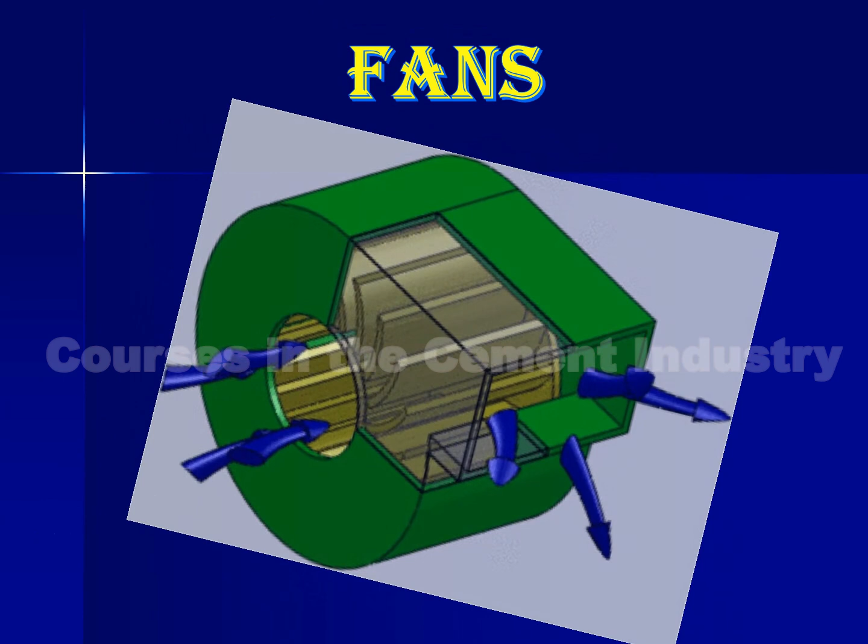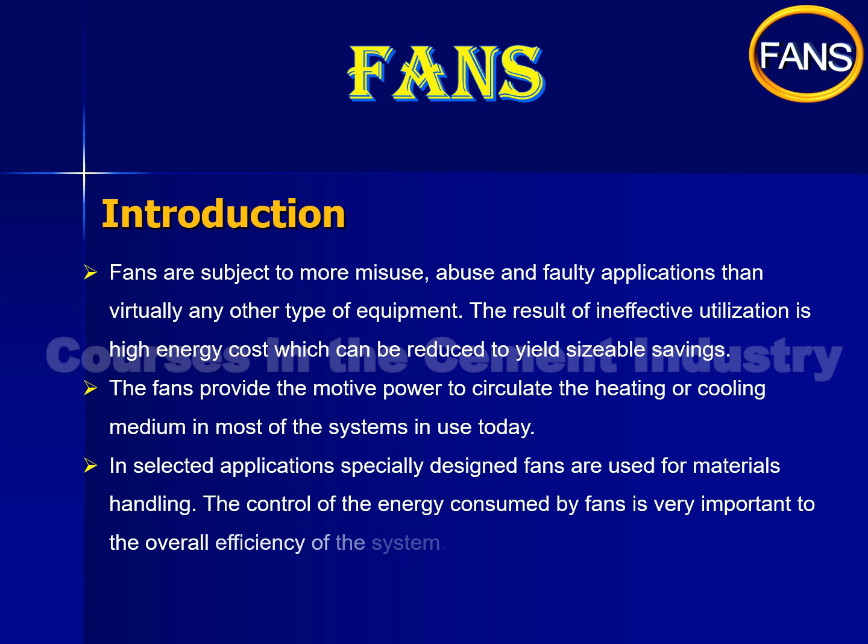Introduction. Fans are subject to more misuse, abuse, and faulty applications than virtually any other type of equipment. The result of ineffective utilization is high energy cost, which can be reduced to yield sizable savings. Fans provide the motive power to circulate the heating or cooling medium in most systems in use today. In selected applications, specially designed fans are used for materials handling. The control of the energy consumed by fans is very important to the overall efficiency of the system.

Definitions for fan. A fan is a device that causes flow of a gaseous fluid by creating a pressure difference on the medium to be transported. The gaseous fluid transported by the fan is most often air, or toxic fumes, whereas blowers may transport a mixture of particulates and air.

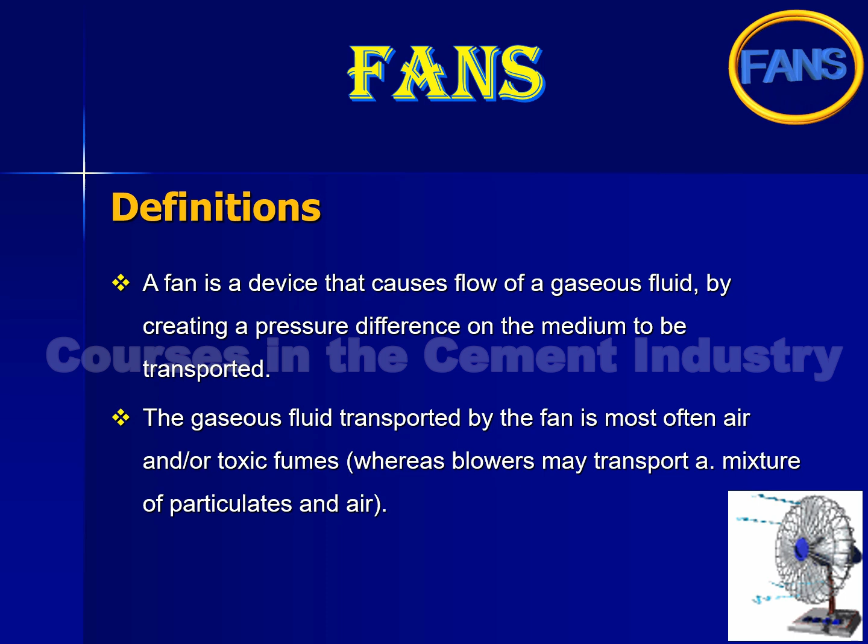A brief on fans: 1. They are air displacement systems, moving air continuously to moderate pressures. 2. Due to little change in pressure of air in fans, air is considered to be incompressible. 3. They can have pressure rise up to 2 psig.

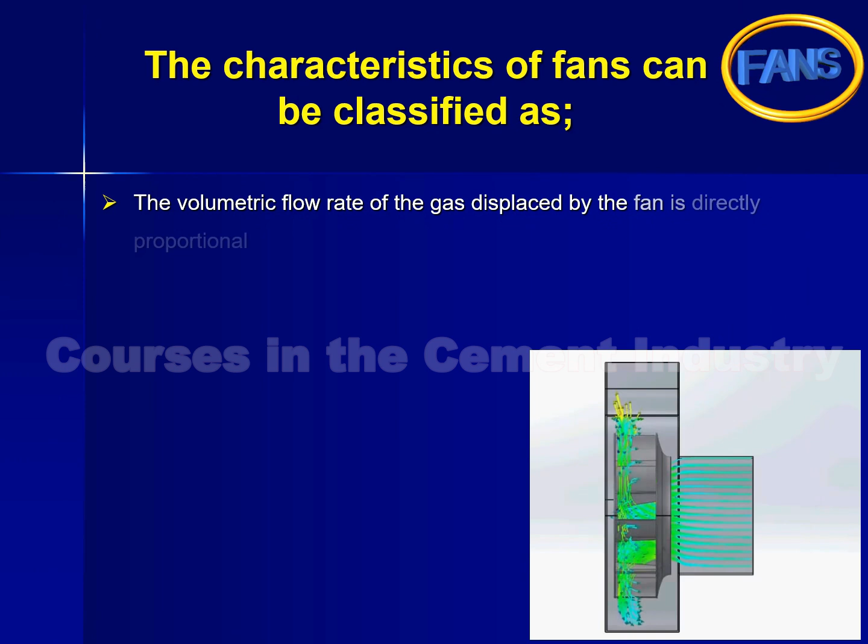The characteristics of fans can be classified as: 1. The volumetric flow rate of the gas displaced by the fan is directly proportional to the fan speed. 2. The static pressure varies with the square of the fan speed. 3. The power consumed varies with the cube of the fan speed.

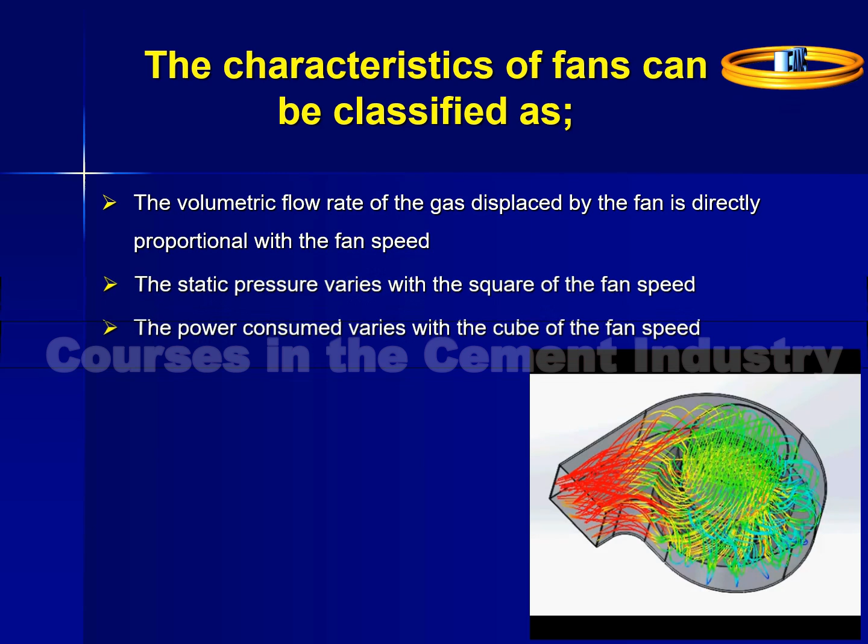Fan type: 1. Axial fans, divided into tube fans, propeller fans, and vane fans. 2. Centrifugal fans, divided into radial blade, forward curved, backward curved, and airfoil.

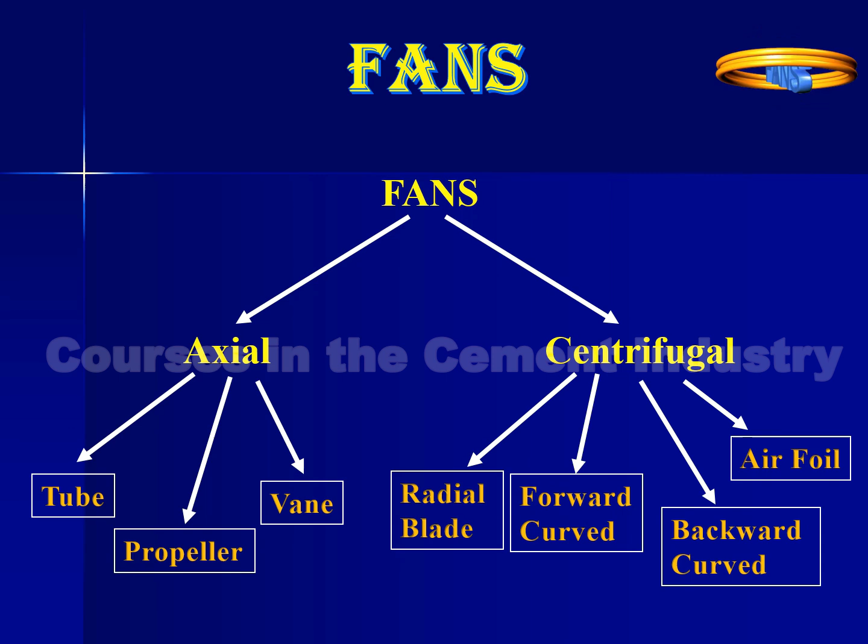Axial fans: gas moves parallel to the axis of rotation. There are 3 types of axial fans: 1. Tube axial fans. 2. Propeller axial fans. 3. Vane axial fans.

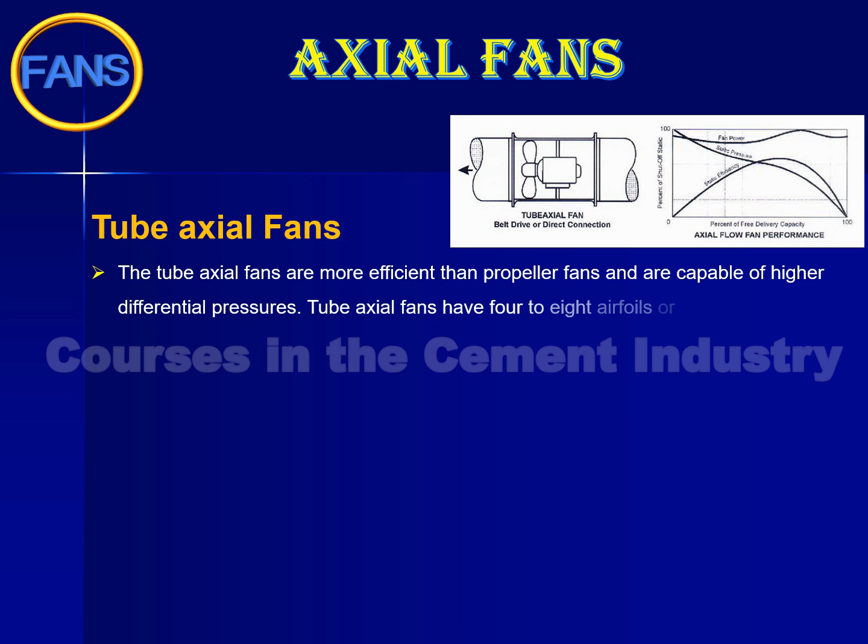Axial fans. 1. Tube axial fans. The tube axial fans are more efficient than propeller fans, and are capable of higher differential pressures. Tube axial fans have 4 to 8 airfoils or curved blades. The housings are cylindrical tubes formed so that the running clearance between the blade tips and the tube is minimal. This construction results in tube axial fans having higher efficiencies than propeller fans.

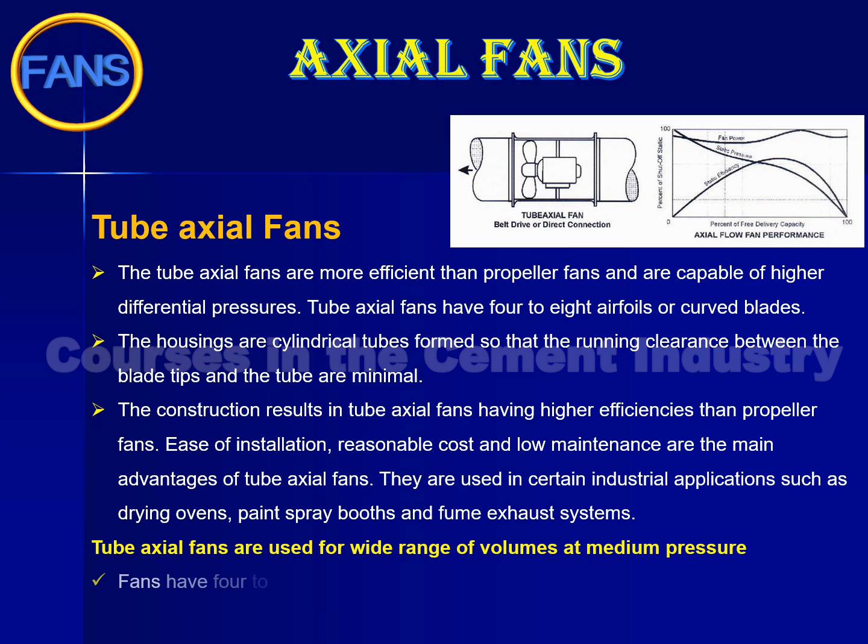Ease of installation, reasonable cost, and low maintenance are the main advantages of tube axial fans. They are used in certain industrial applications such as drying ovens, paint spray booths and fume exhaust systems. Tube axial fans are used for a wide range of volumes at medium pressure. Briefly: 1. Fans have 4 to 8 airfoils or curved blades. 2. Running clearance between the blade tips and the tube is minimal.

2. Propeller fans. The propeller type fan, either direct or belt driven, with flat or slightly curved blades, is usually used in places where they operate against very low pressures, and are very seldom connected to a duct system. They are mostly used to move large volumes of ventilation air through large openings in walls or roofs where the outlet has a small pressure loss.

Briefly: 1. Operate against very low pressure. 2. Move large volumes of ventilation air. 3. Flat or slightly curved blades.

3. Vane axial fans. Other axial fans have blades of an airfoil design, and can be operated against pressure. They are usually direct-driven, and operate at higher speeds than the propeller fans. On this type of fan, the horsepower curve will rise sharply with an increase in speed or system resistance, so that the motor can be easily overloaded.

In vane axial fans there is an air guide vane on the discharge side, and the airflow pattern is a straight line, hence improvement in efficiency and reduction in turbulence is observed. They operate at higher speeds than propeller fans; the horsepower curve will rise sharply with an increase in speed and system resistance, so that the motor can be easily overloaded.

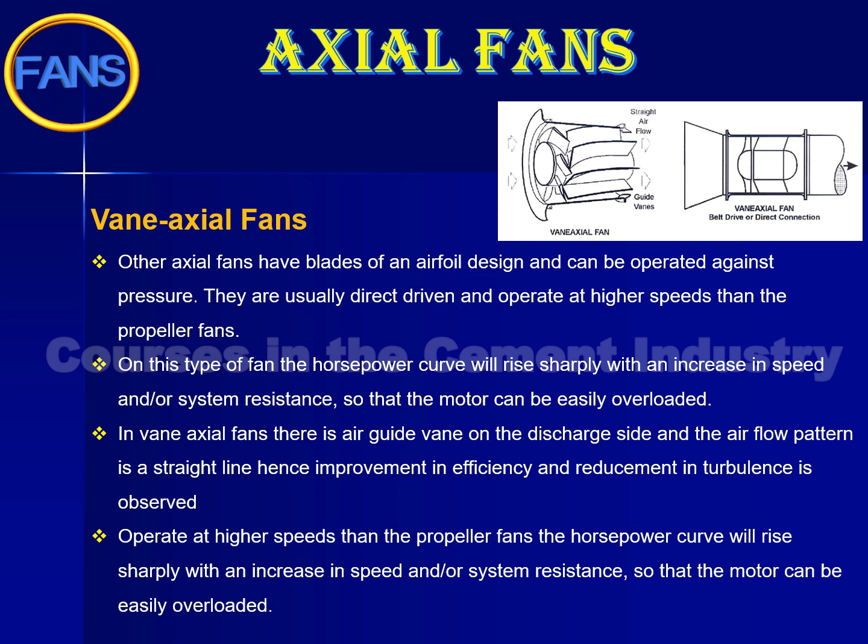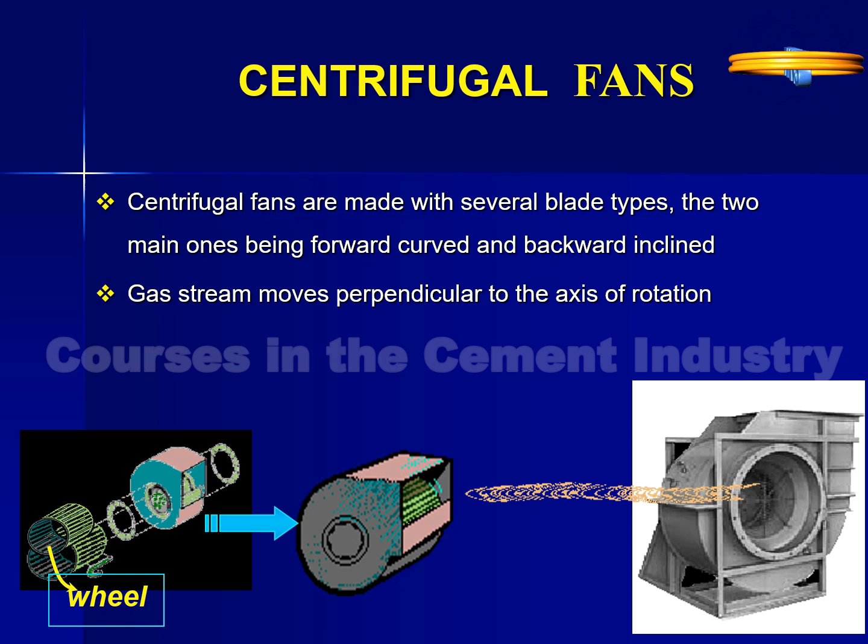Centrifugal fans. 1. Centrifugal fans are made with several blade types, the two main ones being forward curved and backward inclined. 2. Gas stream moves perpendicular to the axis of rotation. 3. They are classified as radial blade, forward curved, backward curved and airfoil.

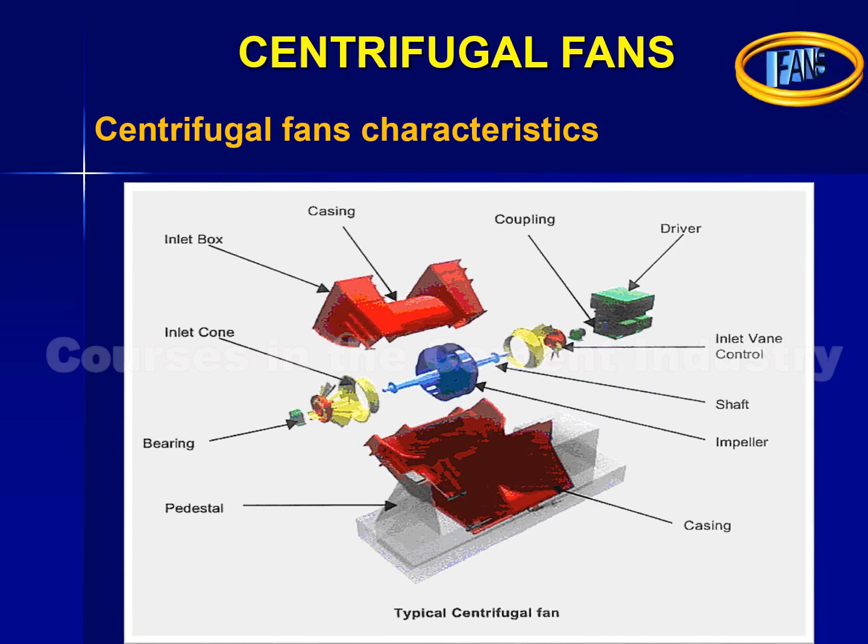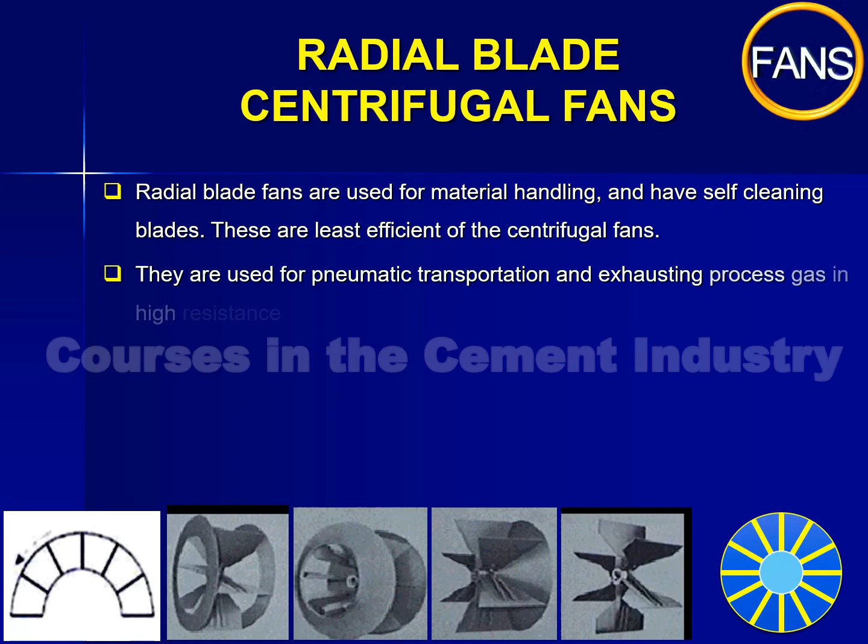Radial blade centrifugal fans. 1. Radial blade fans are used for material handling, and have self-cleaning blades. These are the least efficient of the centrifugal fans. 2. They are used for pneumatic transportation, and exhausting process gas in high-resistance systems.

3. With relatively low capacity, they can achieve high static pressure. 4. They can develop high pressures with high speeds. 5. Blades clean themselves. 6. They are not used for ventilating purposes.

Forward curved centrifugal fans. Forward curved fans are used in most low pressure systems, and run at slower speeds than backwardly inclined wheel types. This type of fan at constant speed will show considerable horsepower increase as the system's static pressure decreases, resulting in the possibility of motor overload.

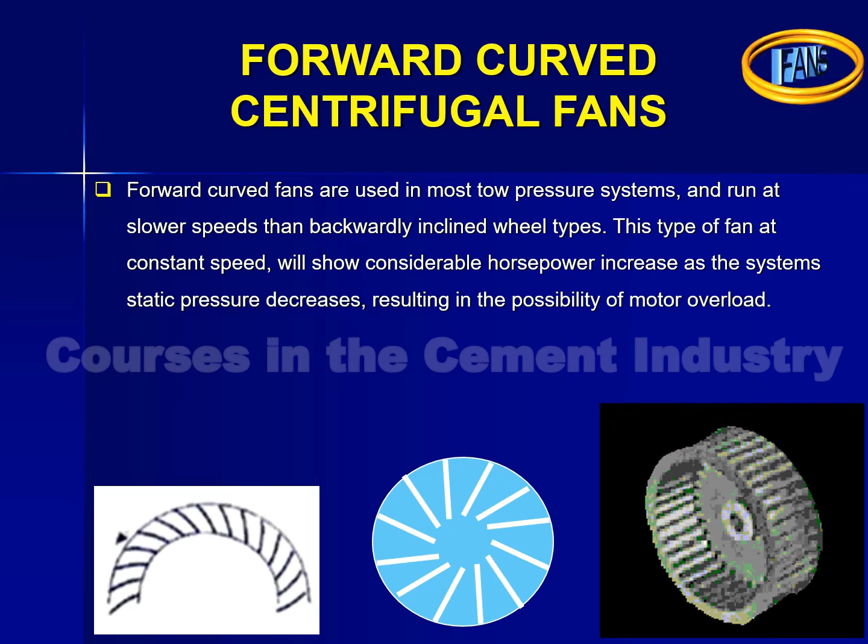They discharge higher volume of air at slower fan speeds. They operate with a moderate amount of noise. They require little space. They are used for clean gases.

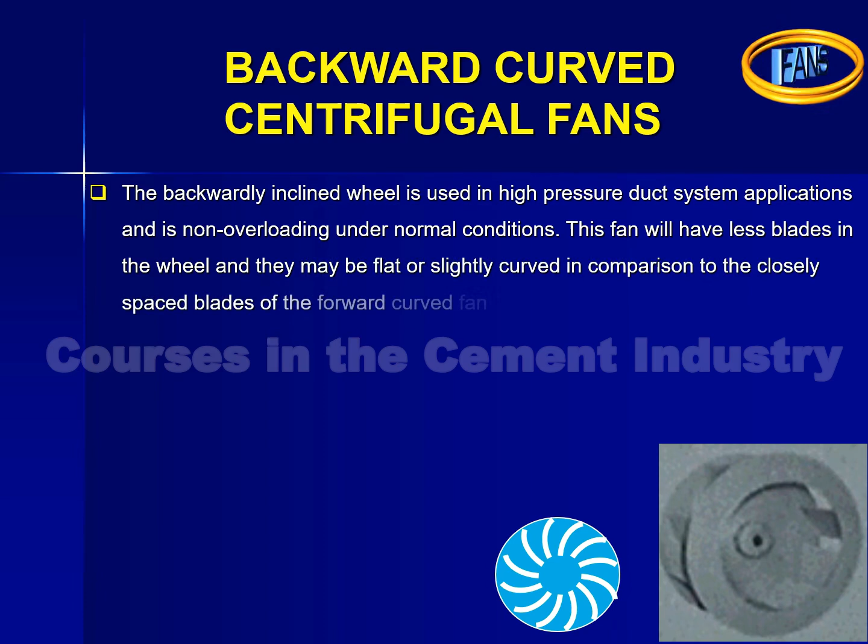Backward curved centrifugal fans. The backwardly inclined wheel is used in high-pressure duct system applications, and is non-overloading under normal conditions. This fan will have less blades in the wheel, and they may be flat or slightly curved, in comparison to the closely spaced blades of the forward curved fan, which are never flat. Backwardly inclined fans will have a higher efficiency in their design range, and will usually operate at considerably higher speeds.

They develop much of their energy directly as pressure. They develop less velocity heads by operating at medium speeds. Small variations in system volume result in small variations in air pressure.

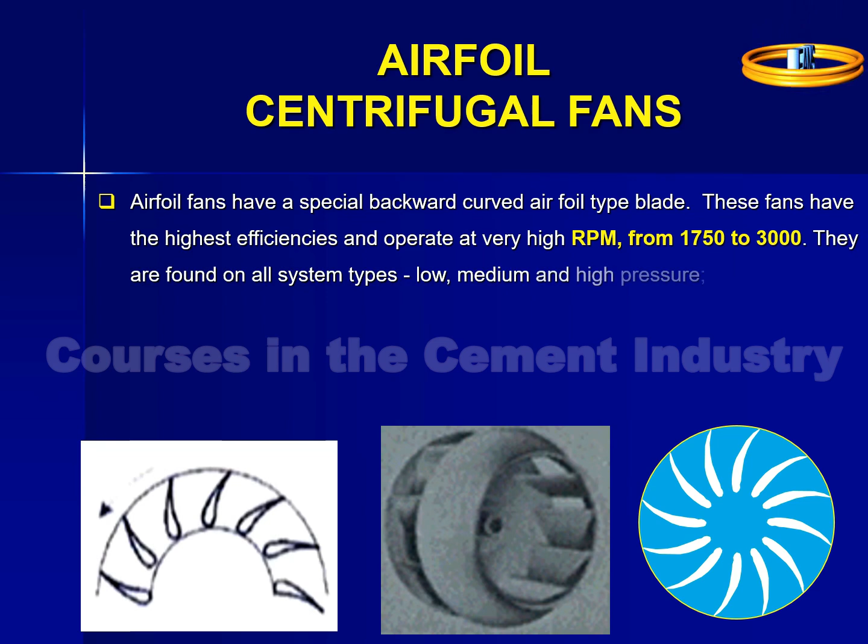Airfoil centrifugal fans. Airfoil fans have a special backward curved airfoil type blade. These fans have the highest efficiencies, and operate at very high RPM, from 1750 to 3000. They are found on all system types, low, medium and high pressure, but are also the most expensive. They can operate more silently since air forms no turbulence while flowing through the wheels.

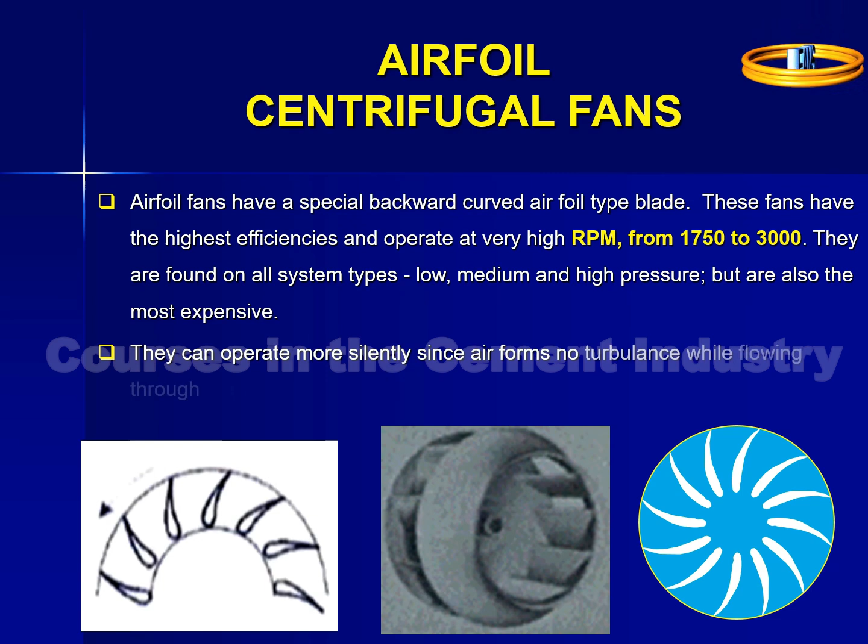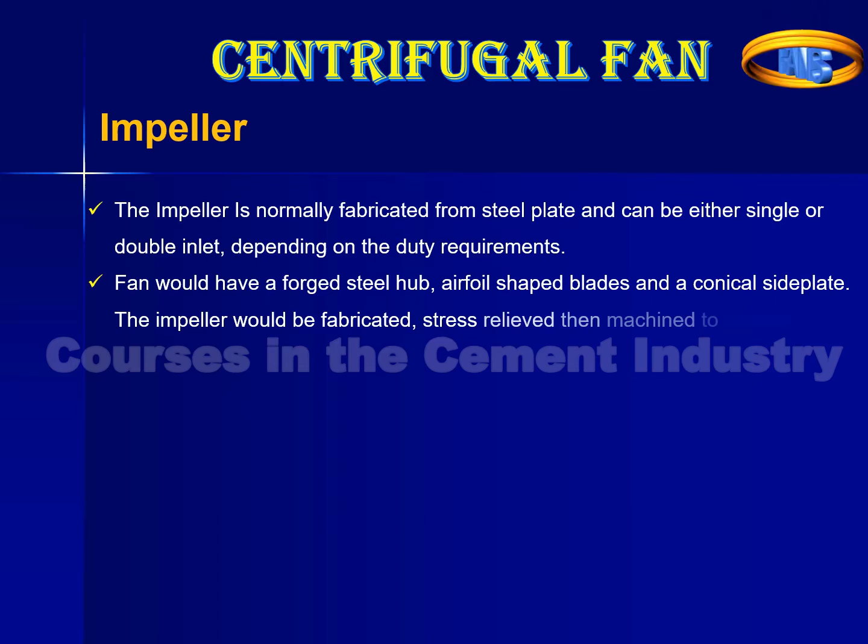Impeller. The impeller is normally fabricated from steel plate, and can be either single or double inlet depending on the duty requirements. The fan would have a forged steel hub, aerofoil-shaped blades and a conical side plate. The impeller would be fabricated, stress-relieved, then machined to provide a fine tolerance and surface finish on the hub bore. The inlet ring would also be machined to ensure a smooth profile, giving good flow at the impeller inlet, and to provide the required running clearance between the static suction cones.

Impellers can also be supplied with backward curved plate blades, which are more appropriate when there are higher dust levels present within the gas stream. The plate blade impeller allows a simpler construction when abrasion protection plates need to be fitted to the blades or center plate.

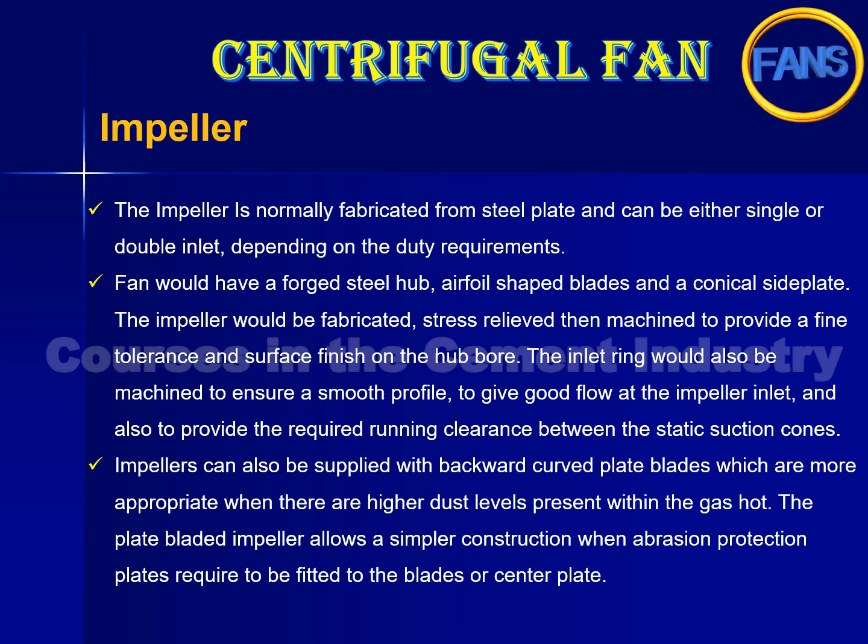So here we are looking at the Howden fans. Just dimensionally, the outside diameter you're looking at is 6 feet.

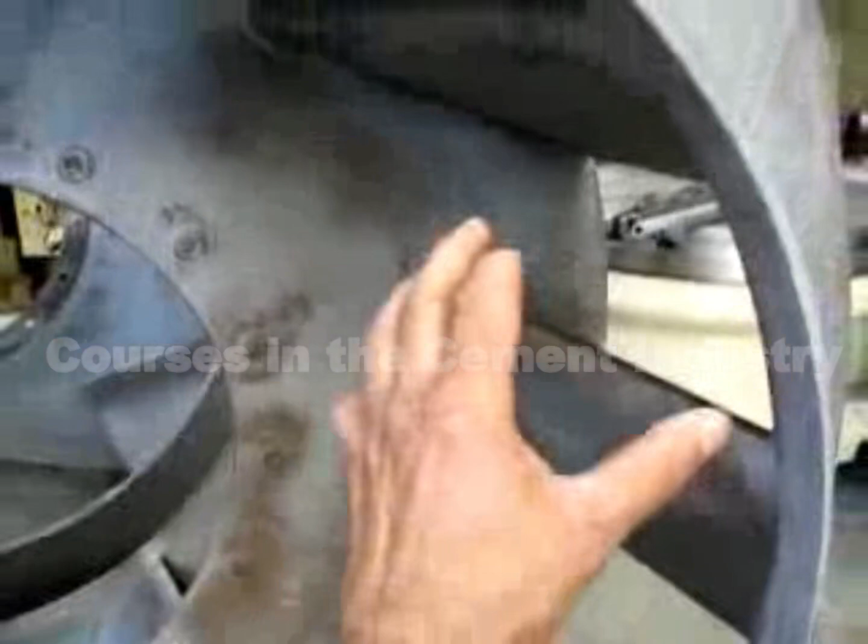The vanes that we're looking at here, they're actually rather like an airplane wing in that they're hollow inside. It's formed, then, out here on the outside. I believe there's a total of 11. Oh yes, it's 4 feet wide. And one side is more eroded than the other side.

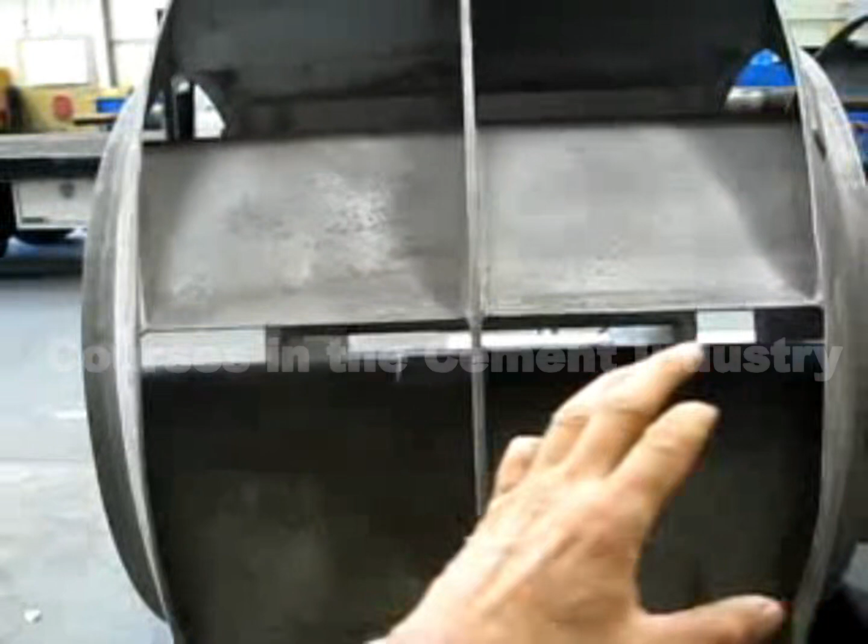One is actually blowing air. The other one is kerosene fumes, as per the client. That's why one side is more eaten up than the other.

All visual, let's count them. 1, 2, 3, 4, 5, 6, 7, 8, 9, 10. Yes, there's 10. There's 11, I'll count again. 1, 2, 3, 4, 5, 6, 7, 8, 9, 10. Actually, there's 10. There's 10 of these vanes for a total of 20.

And actually, I have the two rotors stacked up here. But there's a visual - pretty eaten up.

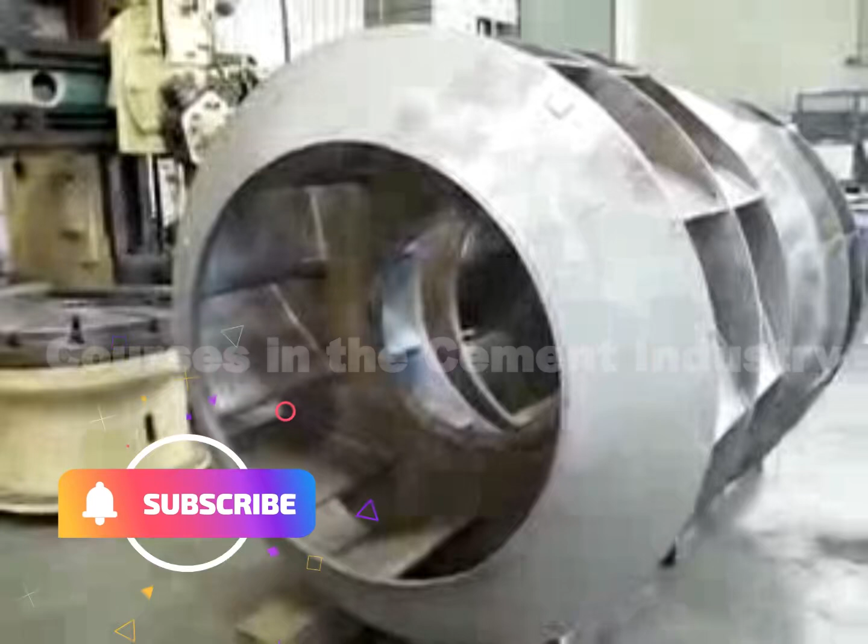So that's the project. The project at hand is to fabricate two fans as we see them.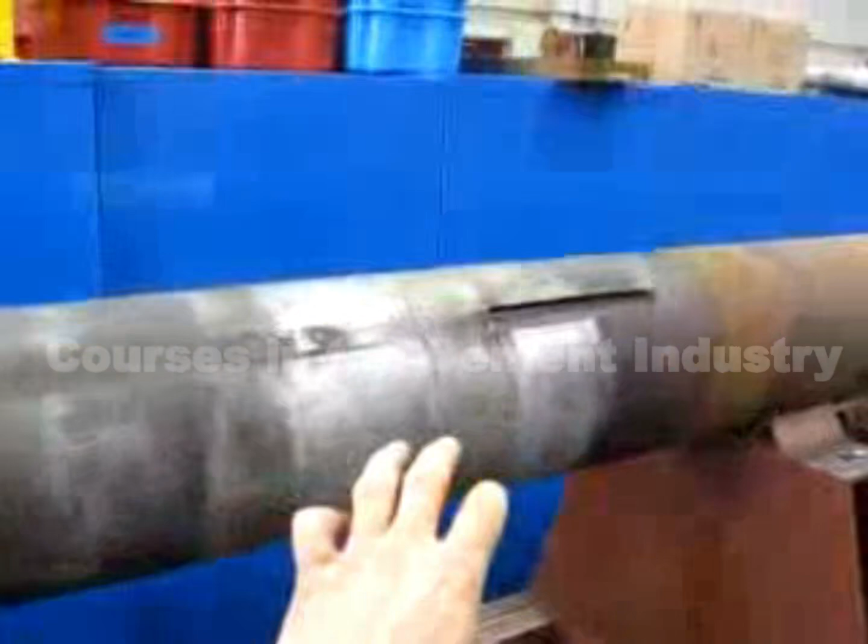That's a 13-inch, by the way. That's the hub. The hub bolts on, and the hub has a two-thou press fit to the shafts. Shafts are in fairly decent condition, they're straight. The hub mounts here, and the fan bolts to the hub.

So that's the project. Two fans.

Impeller variation. Many fans within the range have been tested with varying geometry impellers in a standard casing, with variations in blade length and width. Thus each of these fan designs can be considered as possessing a performance envelope rather than a single performance curve. This permits better optimization during selection. This flexibility has therefore permitted fan development resources to be concentrated on a core range of basic fans, rather than on a larger number of individual designs.

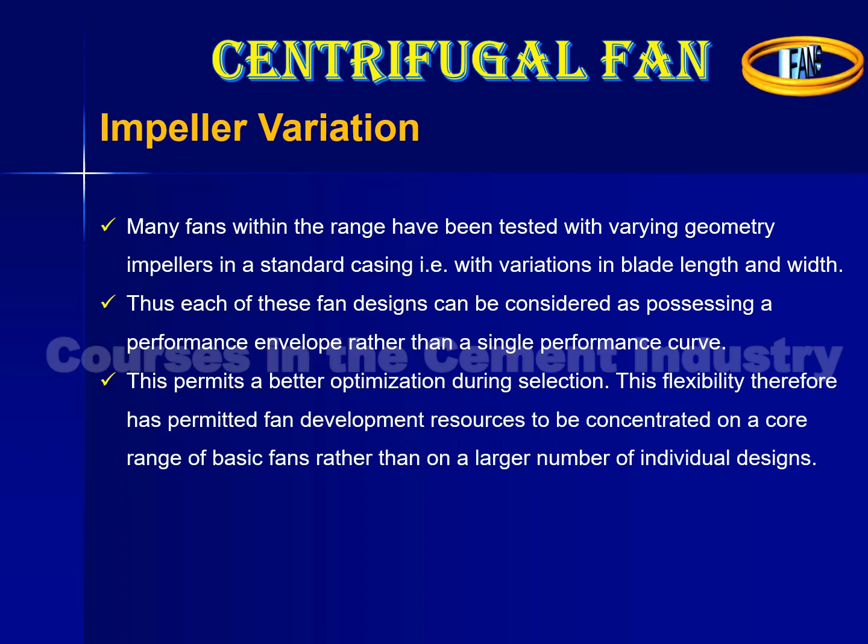Impeller shape. Backward blade fans. This type of centrifugal fan is highly efficient and mechanically robust. Low specific speed fans are characterized by small inlets and long narrow blades. As specific speed increases, the designs become broader, with larger inlets and shorter blades.

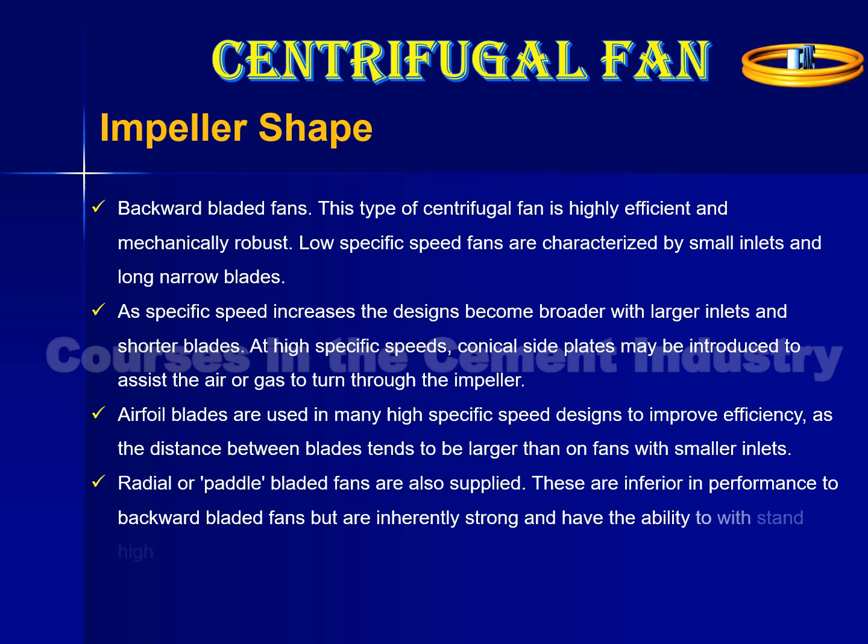At high specific speeds, conical side plates may be introduced to assist the air or gas to turn through the impeller. Airfoil blades are used in many high specific speed designs to improve efficiency, as the distance between blades tends to be larger than on fans with smaller inlets. Radial or paddle blade fans are also supplied. These are inferior in performance to backward blade fans, but are inherently strong and have the ability to withstand high dust burdens within the gas stream.

Shaft. The shaft is machined from a mild steel forging, and the impeller can be mounted either between bearings, or overhung in the case of a single inlet fan. The shaft is designed to achieve a safe margin between running speed and critical speed. The shaft diameter is dictated by the fan arrangement, the bearing centers, and the impeller weight.

Up to operating temperatures of 200 degrees C, the impeller is mounted to the shaft using an interference fit. Above this temperature, interference fit and a key is used. The size of the interference fit is selected to ensure that the impeller hub bore is kept centrally located on the shaft, under the action of both centrifugally generated stresses within the impeller and thermal expansion. This ensures that there will be no relative movement between impeller and shaft during normal operation.

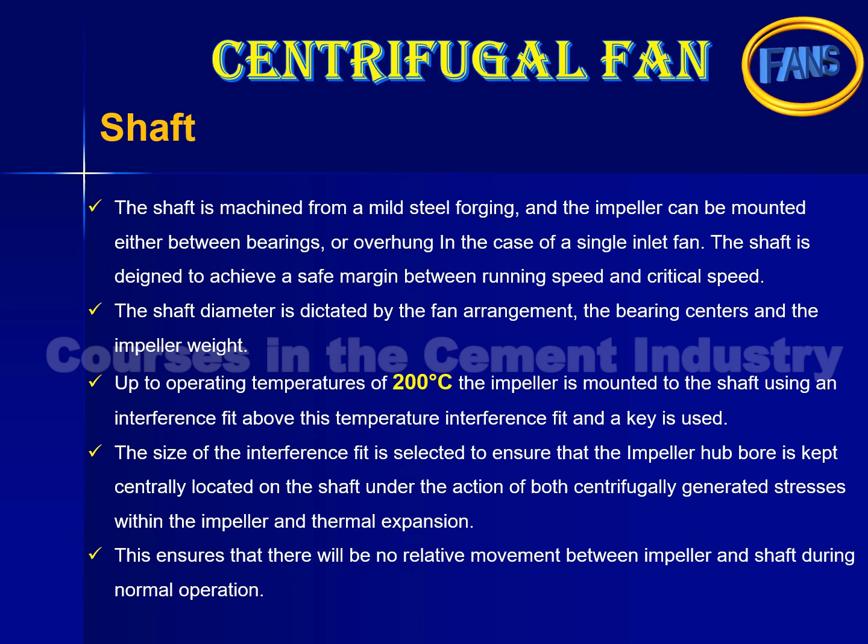Bearings. Depending upon the duty and the client's specification, the fan can be supplied with either sleeve bearings, oil pressure fed, ring oil or disc lubricated, with or without water cooling, or with rolling element bearings. The located bearing is normally sited at the drive end. The bearings can be fitted with temperature or vibration detectors.

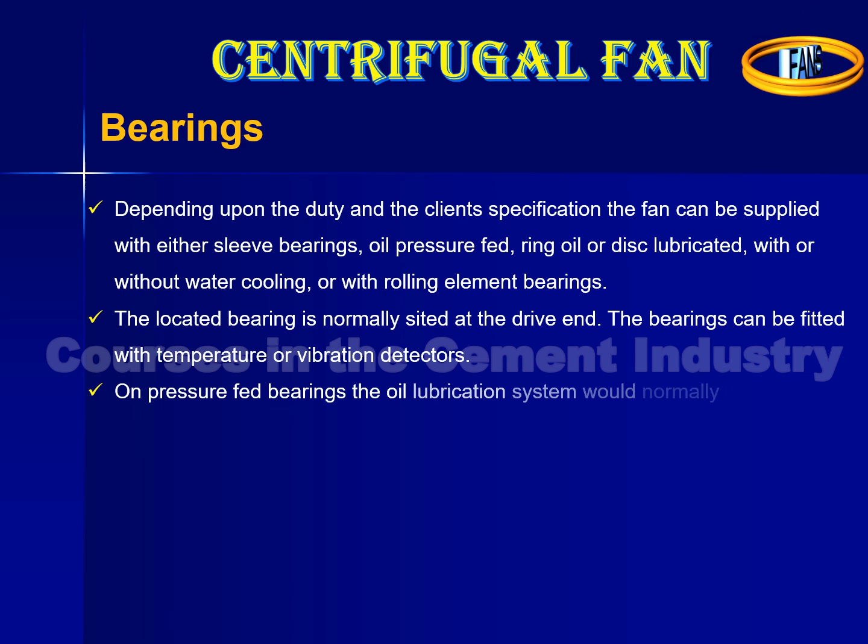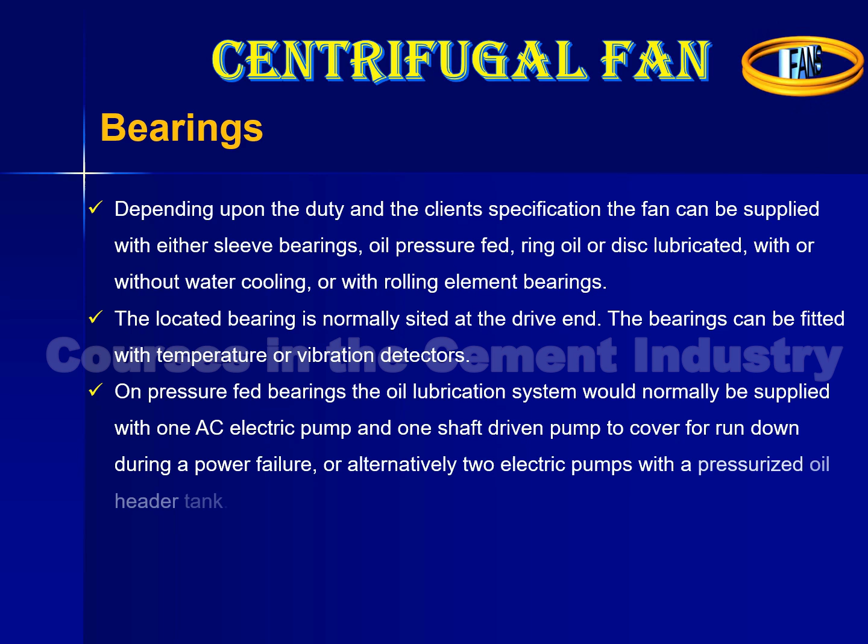On pressure-fed bearings, the oil lubrication system would normally be supplied with one AC electric pump, and one shaft-driven pump to cover for rundown during a power failure, or alternatively two electric pumps, with a pressurized oil header tank.

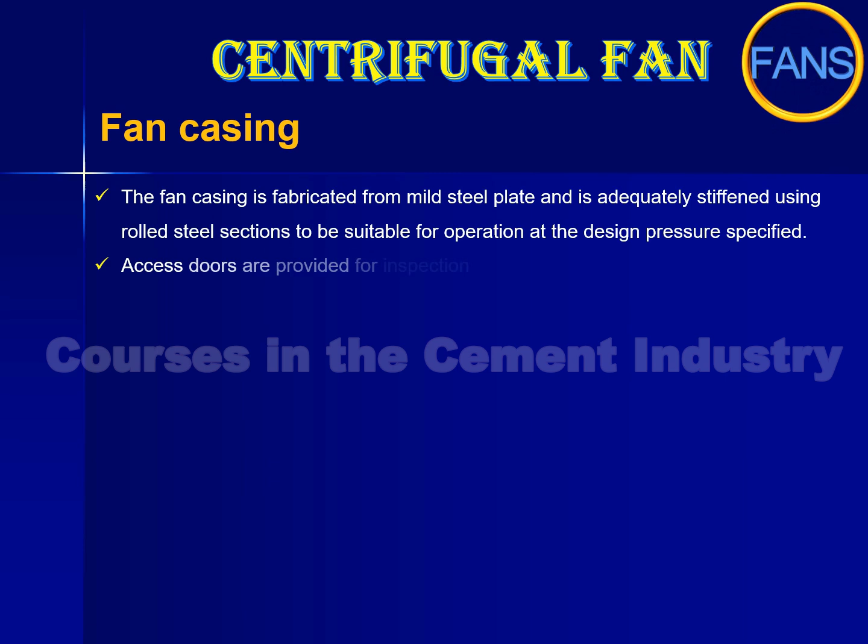Fan casing. The fan casing is fabricated from mild steel plate, and is adequately stiffened using rolled steel sections, to be suitable for operation at the design pressure specified. Access doors are provided for inspection and maintenance. The casing will be split with a bolted joint at a suitable position, to allow for impeller and shaft removal.

Either a single carbon ring seal, or a floating annular plate seal will be installed, where the shaft penetrates the casing wall. The fan performance is based on a controlled expansion, at a maximum discharge angle of 7 degrees, to a specified area, normally given at the tender stage. This expansion duct is not normally included.

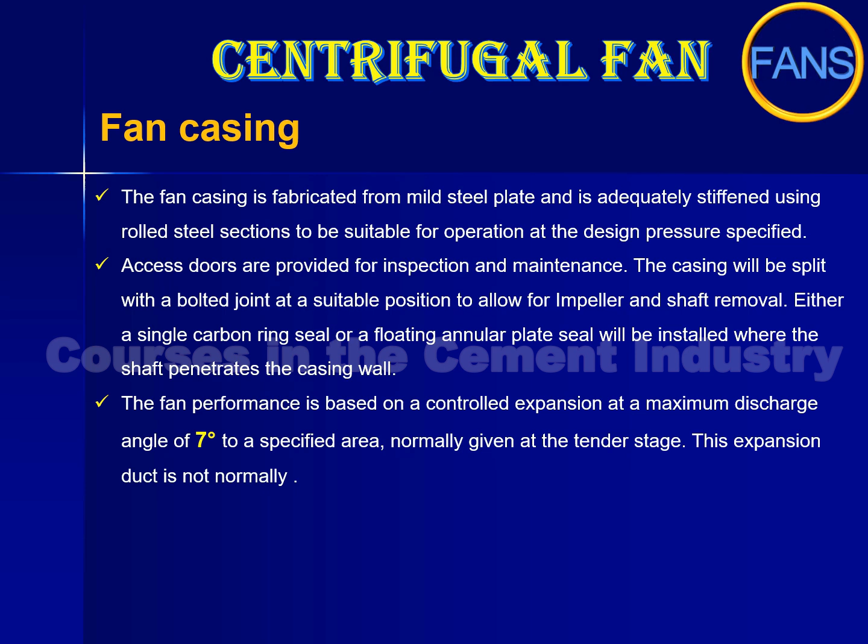It is important to note that no unspecified duct loads can be transmitted onto the fan casing, inlet and outlet flange connections, as this can affect the alignment, resulting in changes to the fine running clearances between the impeller and the inlet suction cone. Expansion joints should be fitted.

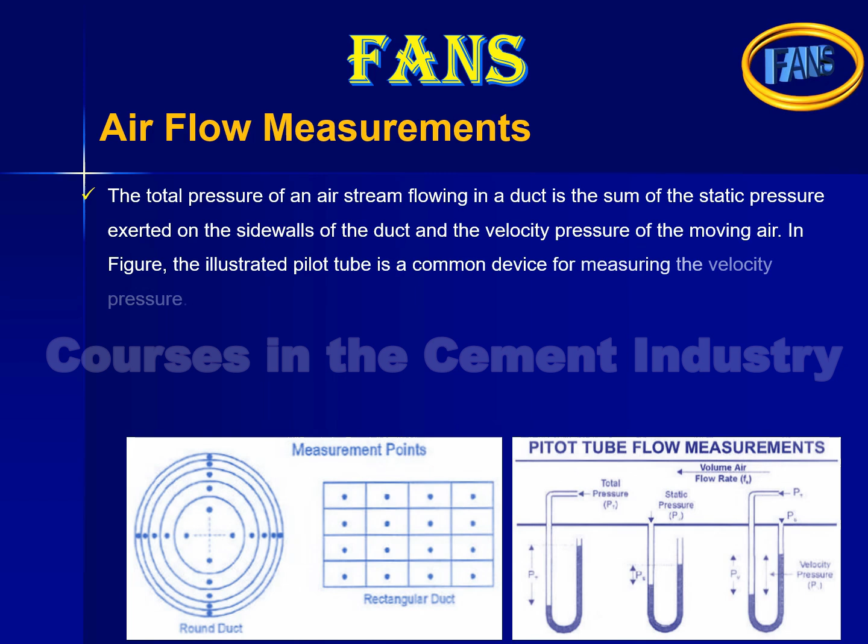Airflow measurements for fans. The total pressure of an air stream flowing in a duct is the sum of the static pressure exerted on the side walls of the duct, and the velocity pressure of the moving air. In this figure, the illustrated pitot tube is a common device for measuring the velocity pressure. Measurements should be taken in accordance with traverse details shown. The velocity pressure should be calculated for each traverse position, and the readings averaged.

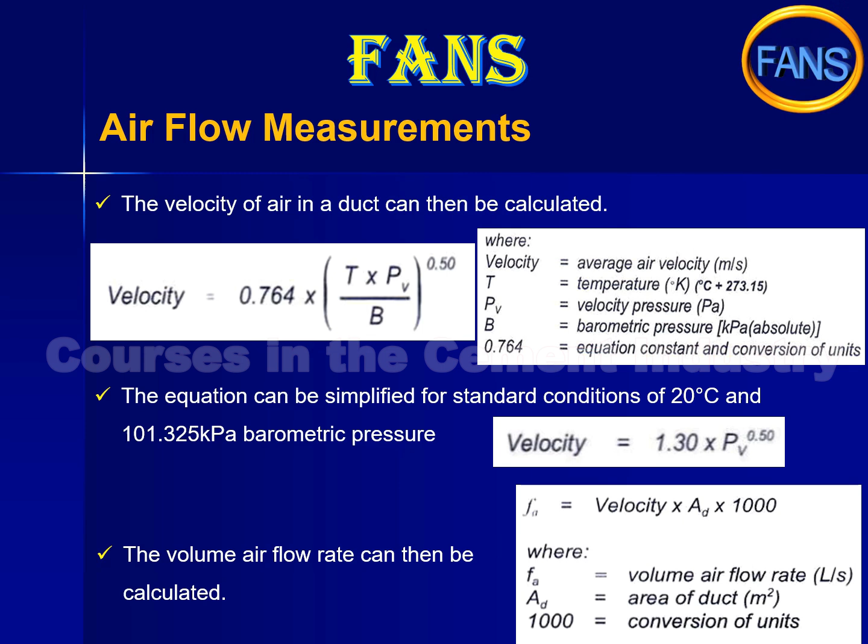Fan performance measurements. The performance of fans is easily determined by calculations based on measured data taken at the fan inlet and outlet using the methods previously described. Several factors, however, can affect the accuracy of the field measurements.

1. Airflow not at right angles to the measurement plane. 2. Non-uniform velocity distribution. 3. Irregular cross-sectional shape of the duct or passageway. 4. Air leaks between the measurement plane and the fan.

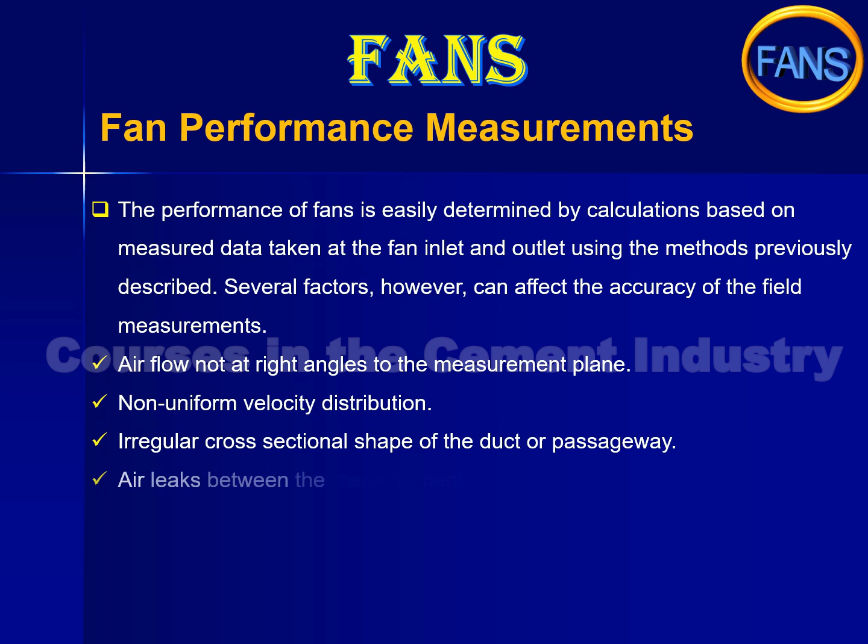The total differential pressure across the fan can be calculated from the measured data. See this equation. The total fan static differential pressure can also be calculated. See this equation. The effect of inlet and outlet conditions have not been included in these equations, however they provide a reasonable basis for the further calculation of fan power and static efficiency.

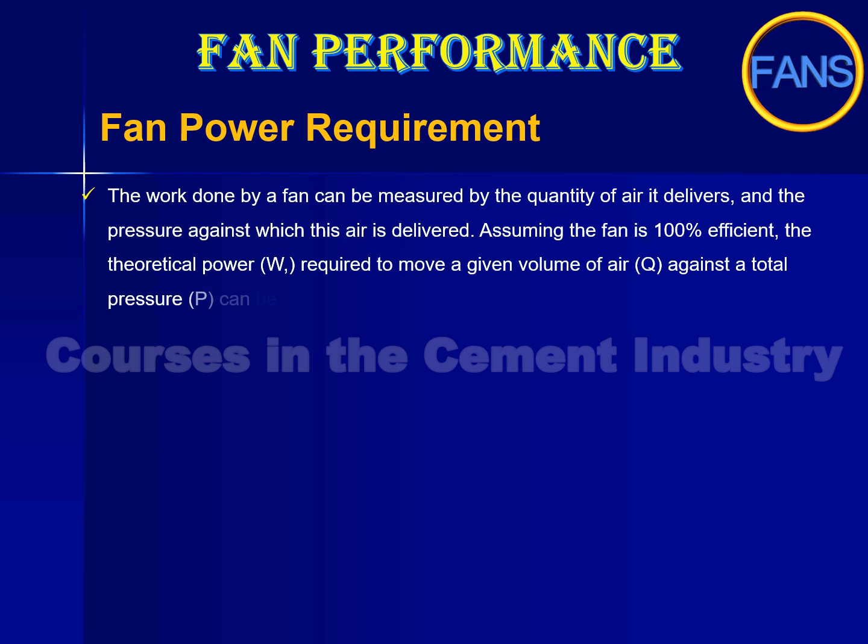Fan performance. Fan power requirement. The work done by a fan can be measured by the quantity of air it delivers, and the pressure against which this air is delivered. Assuming the fan is 100% efficient, the theoretical power, W, required to move a given volume of air, Q, against a total pressure, P, can be calculated as follows.

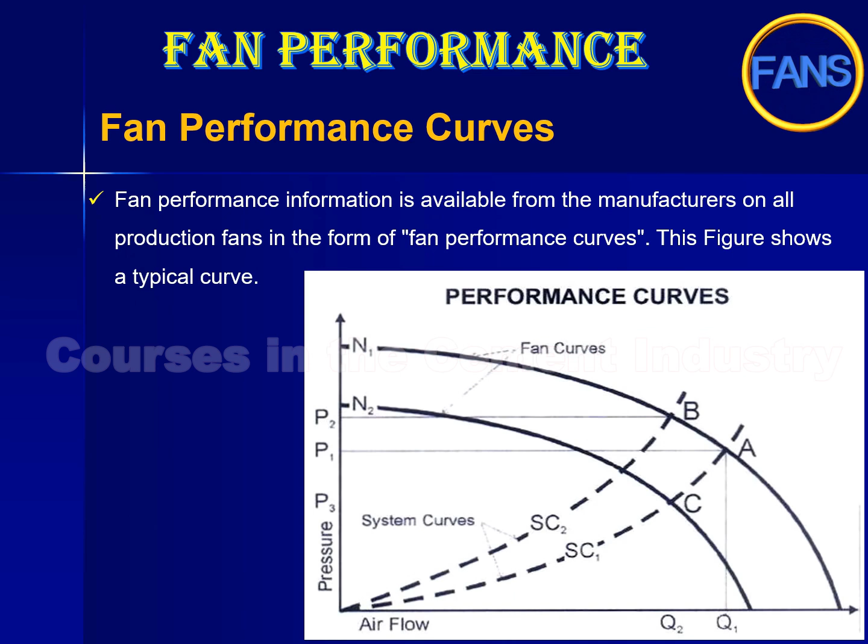A fan operates along a performance curve given by the manufacturer for a particular fan speed. The fan performance chart shows performance curves for a series of fan speeds. At fan speed N1, the fan will operate along the N1 performance curve as shown in the schematic. The fan's actual operating point on this curve will depend on the system's performance characteristics.

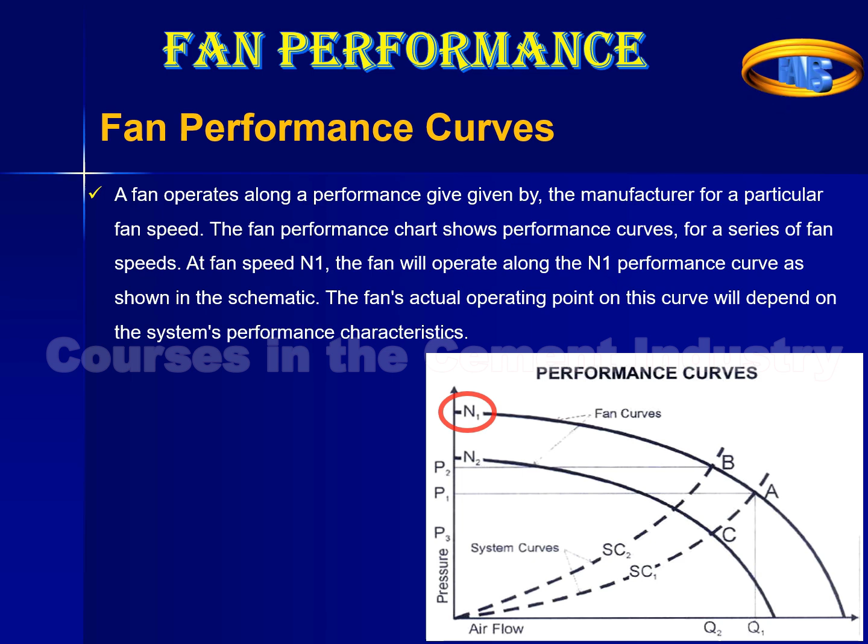In any fan system, the resistance to airflow, pressure, increases when the flow of air is increased. The pressure required by a system over a range of flows can be determined and a system performance curve can be developed, shown as SC1. This system curve can then be plotted on the fan curve, to show the fan's actual operating point A, where the two curves N1 and SC1 intersect. This operating point is at airflow Q1, delivered against pressure P1.

We follow together fan performance curves. Two methods can be used to reduce airflow. One is to restrict the airflow by partially closing a damper in the system. This action causes a new system performance curve, SC2, where the required pressure is greater for any given airflow. The fan will now operate at point B, to provide the reduced airflow Q1, against pressure P2.

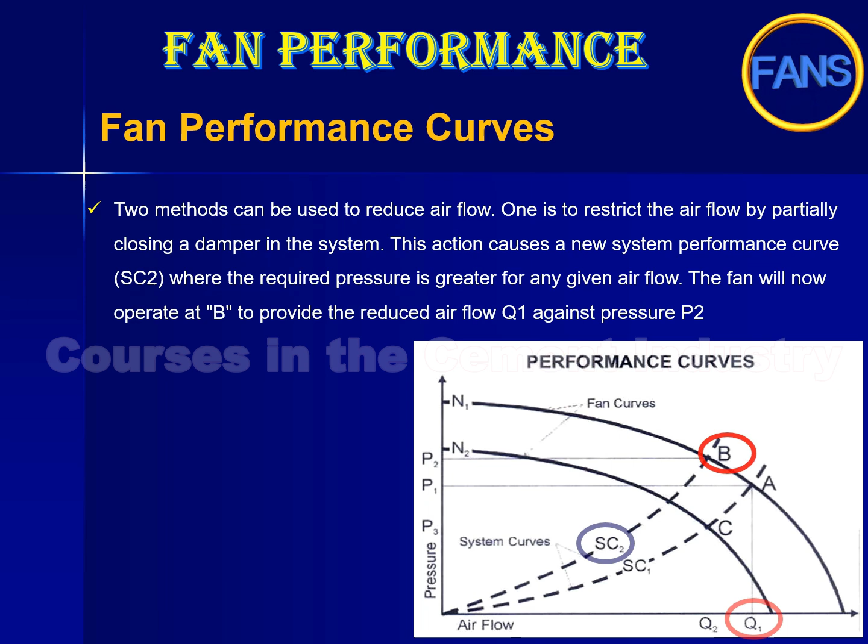We follow together fan performance curves. The airflow could also be decreased by leaving the damper fully open and reducing the fan speed to N2. The fan would operate at C, to provide the same Q2 airflow but at a lower pressure P3. Reducing the fan speed is a much more efficient method to decrease airflow, since less power is required and less energy is consumed.

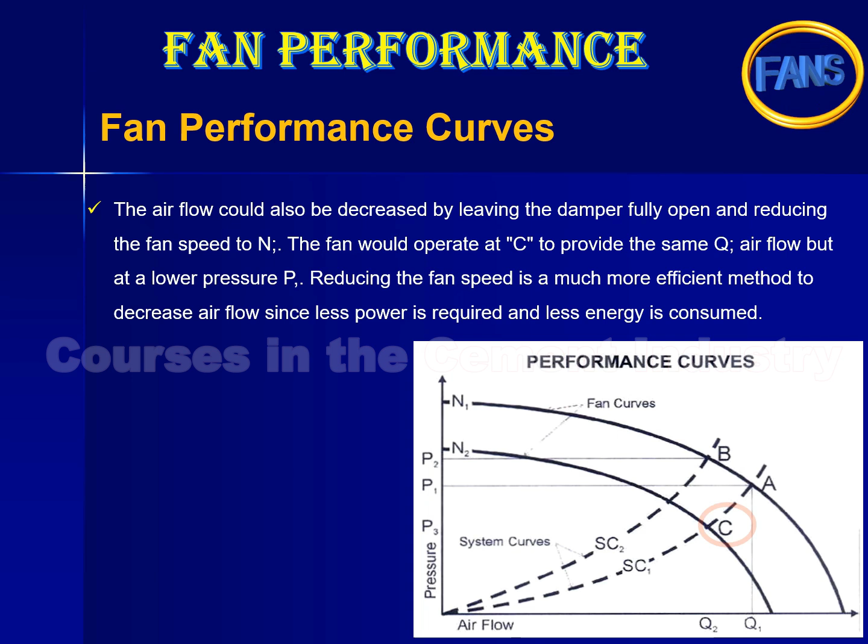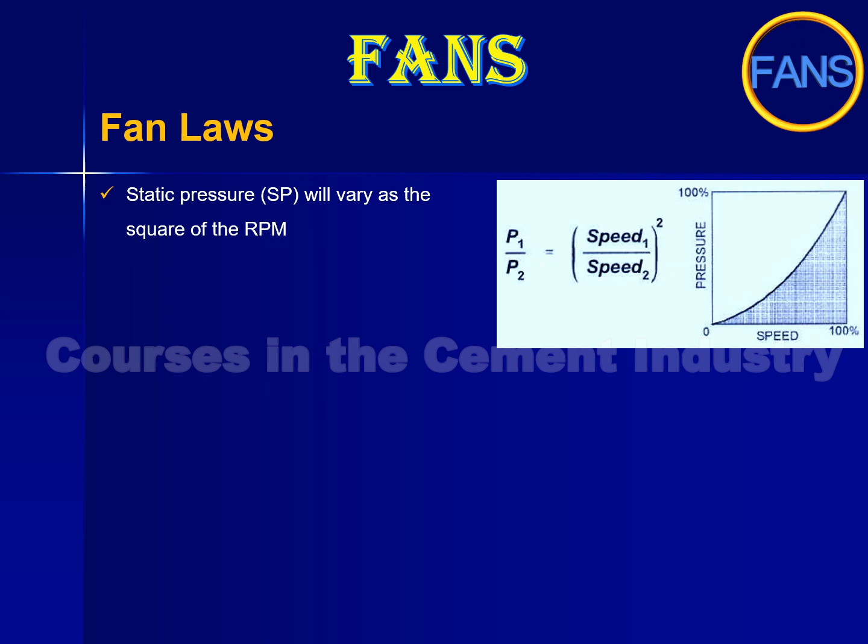We follow together fan laws. In this figure illustrate: 1. Static pressure, SP, will vary as the square of the RPM. 2. Varying the RPM by 10% decreases or increases the static pressure by 19%. See this equation. In this figure illustrate: 1. Fan power, kilowatt, will vary as the cube of the RPM. 2. Varying the RPM by 10% decreases or increases the power requirement by 27%. See this equation.

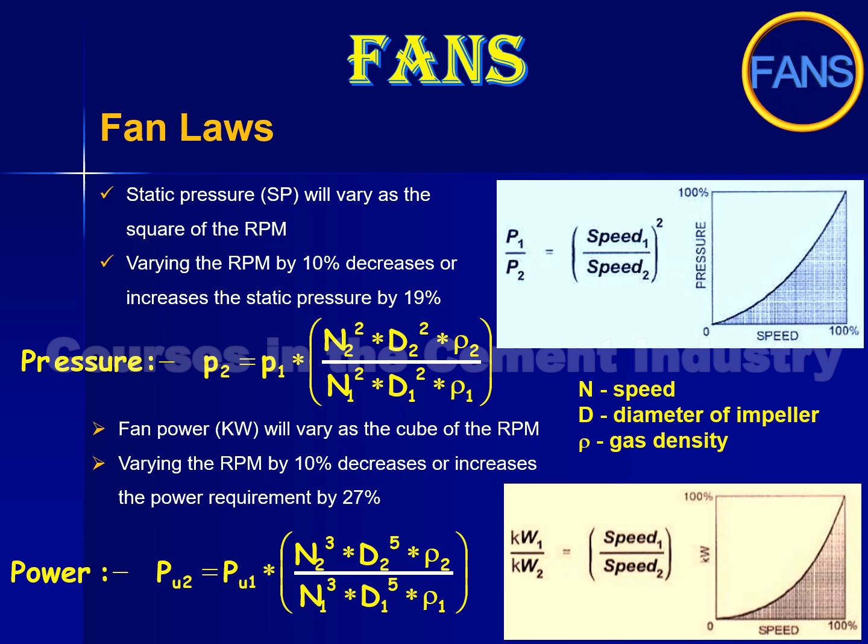Fan accessories. 1. Access doors. Bolted and quick opening access doors are available for easy access to the fan interior for inspection or cleaning. All access doors are gasketed, and are constructed with either evenly spaced studs, or heavy-duty hinges and handle-type nuts, which require no tools to open. Raised bolted access doors are available for use where insulation is being applied to the outside of the fan.

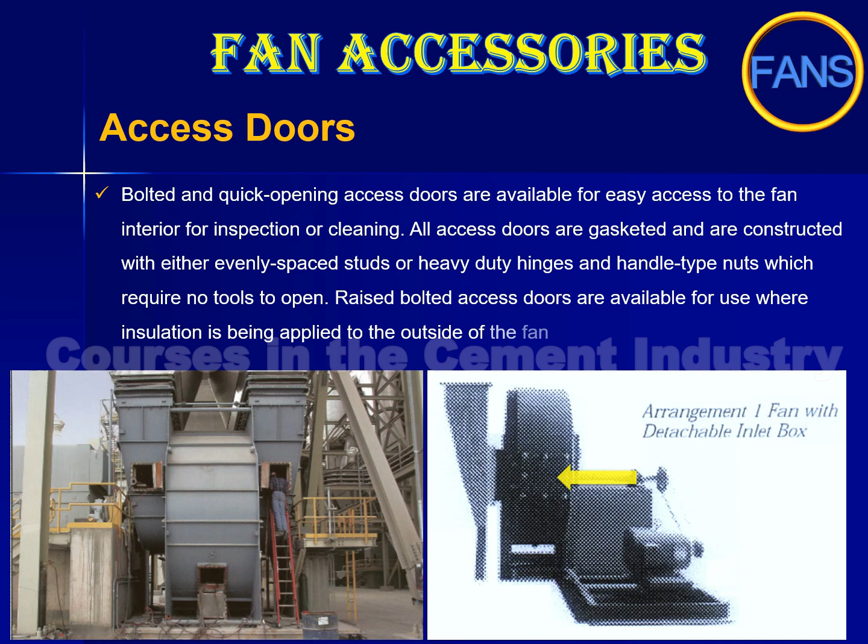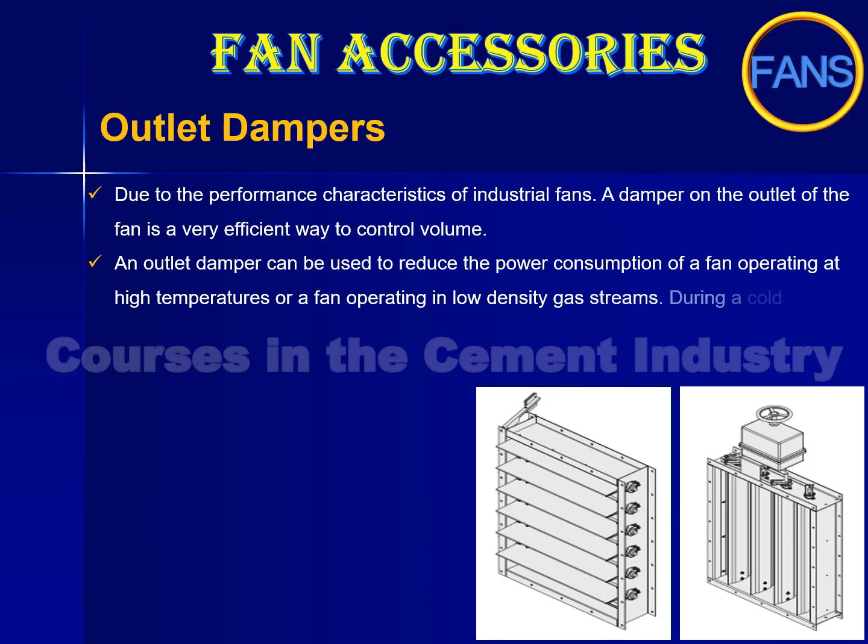3. Outlet dampers. Due to the performance characteristics of industrial fans, a damper on the outlet of the fan is a very efficient way to control volume. An outlet damper can be used to reduce the power consumption of a fan operating at high temperatures, or a fan operating in low-density gas streams. During a cold startup, the outlet damper begins in a closed position, and is opened gradually as the fan reaches operating temperature. This allows for the use of a smaller motor, sufficient to handle the duty at higher temperatures. See this video.

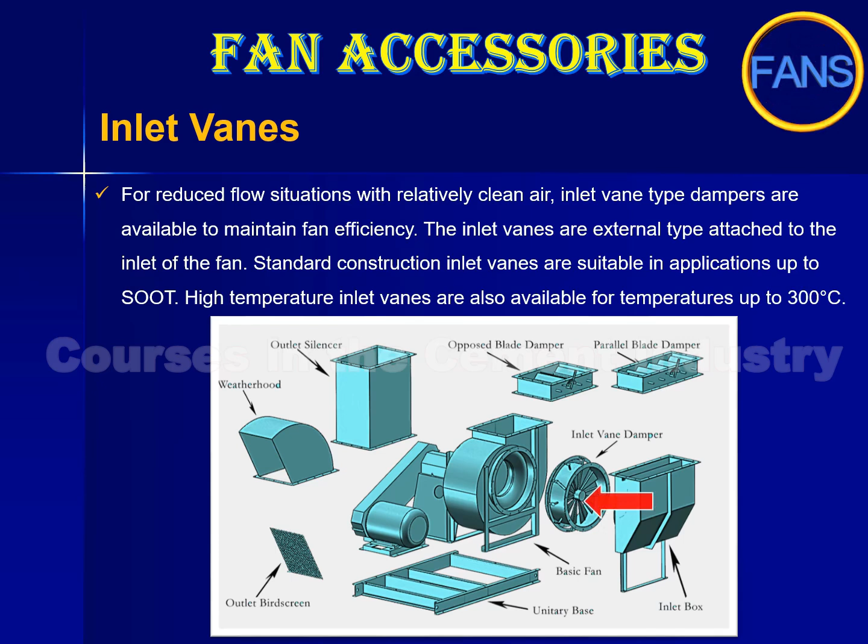5. Inlet boxes. An inlet box is designed to minimize pressure drop and airflow losses. Inlet boxes are recommended for applications where uniform flow is difficult to obtain due to limited space, or where the air must enter the fan at an angle. Inlet boxes can be either detachable or integral to the fan. This option is available with an inlet box damper to provide increased airflow control. See this video.

6. Shaft coolers. Where high temperatures are encountered, the aluminum shaft cooler is recommended for dissipating heat and protecting bearings from the high temperature atmosphere. See this video.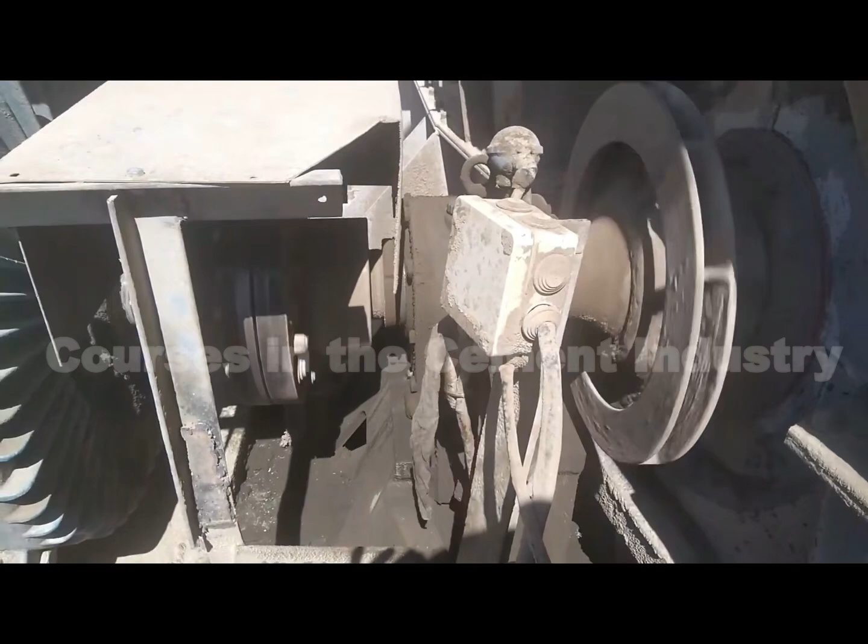7. Shaft seals. The standard shaft seal is a non-asbestos type, sandwiched between two plates and the fan housing, providing a seal for most materials being handled. A variety of special seals, including mechanical type stuffing boxes, is available for gas-tight applications requiring more positive protection. See this video.

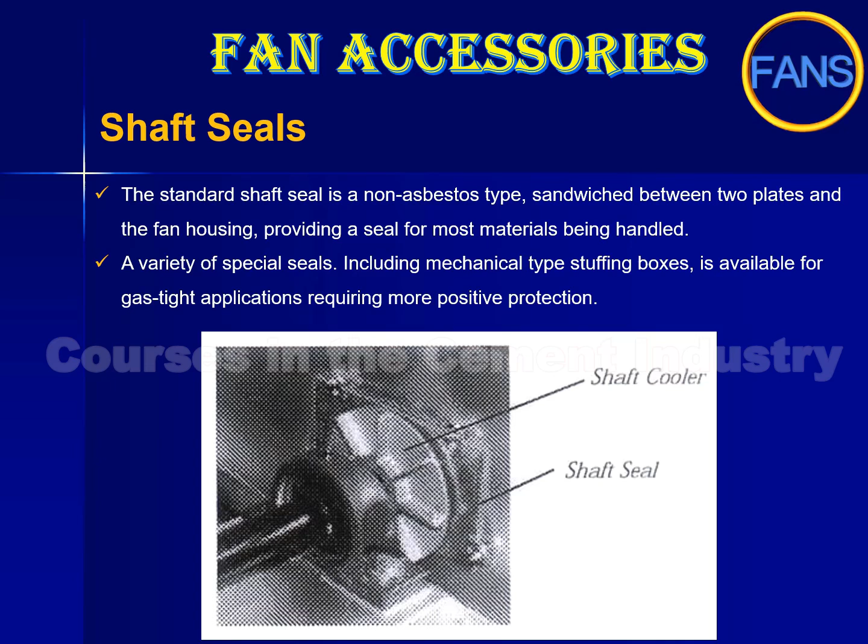8. Drains. A pipe coupling can be welded to the lowest point in the housing scroll, to allow wash water or condensation to drain.

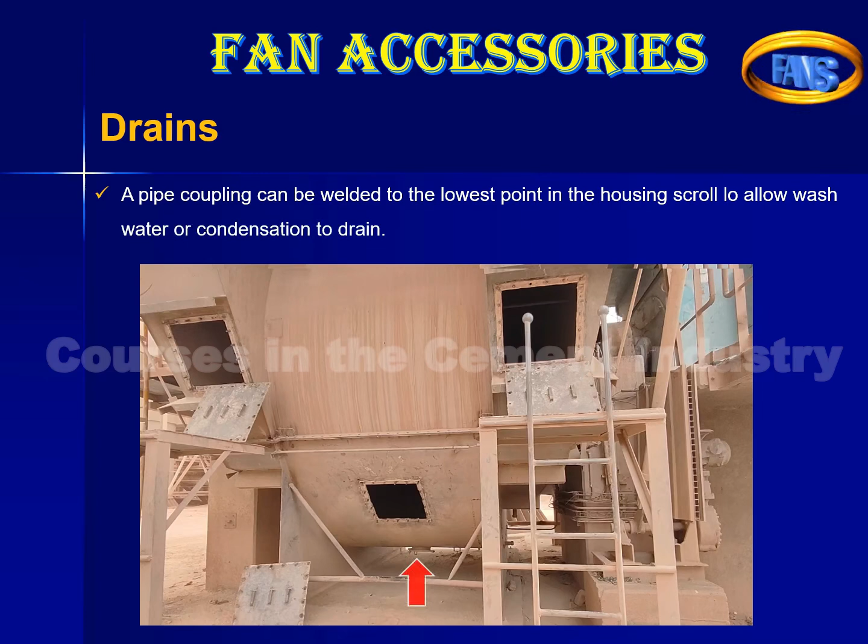9. Spark-resistant construction. Three fan constructions are available for spark resistance. The materials used in the construction of these fans minimize the potential of sparks being generated by striking or rubbing components within the air stream. Notes: 1. The user must electrically ground the fan. 2. Standard spark-resistant alloy is aluminum. 3. Bearings must not be placed in the air or gas stream.